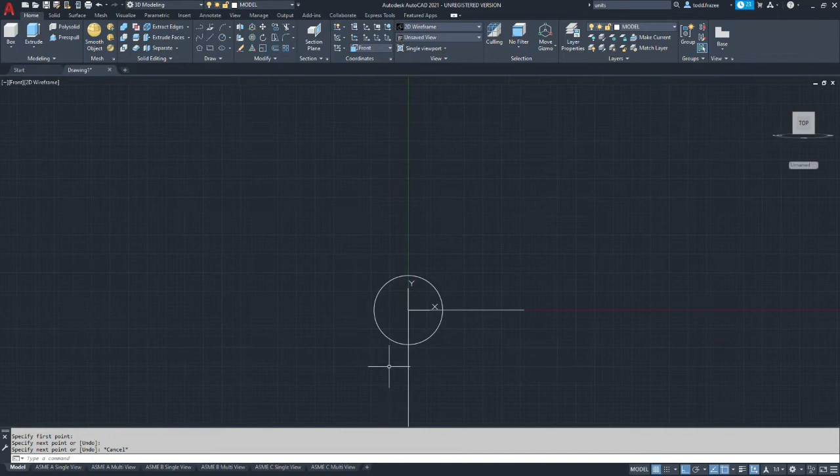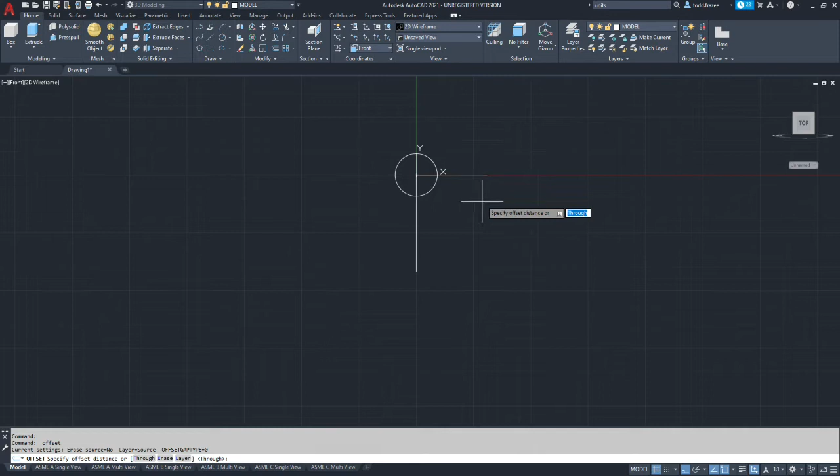Now I'm going to extend. I'm going to extend the two lines I can, and then I'm going to make a kind of bogus line over here just so that I can extend this third line, and that'll allow me to extend the line that's going to make up the width of the base.

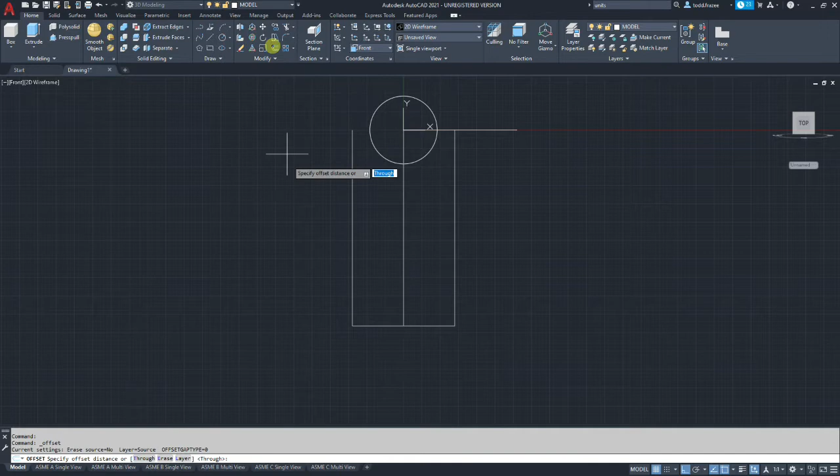Alright, let's switch to trim and trim off those two items, and we'll go ahead and delete the extra line there. So from the base, our base height is 11 millimeters. So we're going to put in 11 millimeters and offset from the bottom for the thickness of our base. Okay, so then we can go ahead and trim off those features.

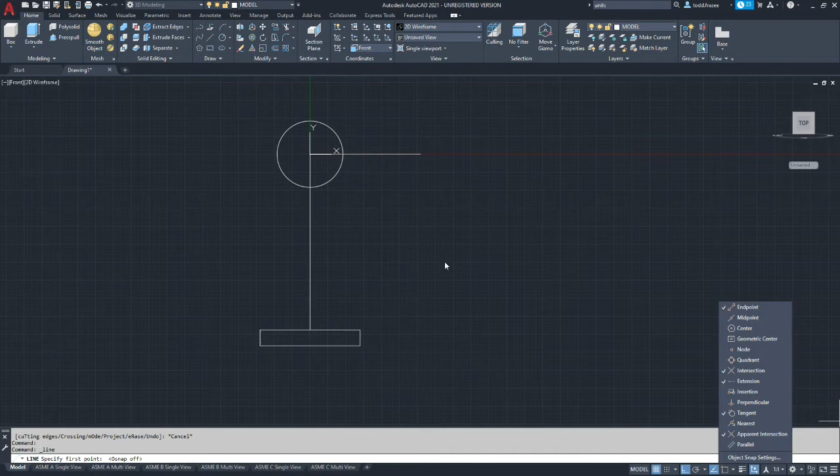Now we want to make our tapered sides for the upper web. And so we're going to use the line command, but we need to change our OSNAP settings. We're going to avoid the center because we want to pick up on a tangent. And you want at least intersection highlighted. I'm also going to deselect midpoint. I don't want to accidentally get the midpoint of something I don't want to use.

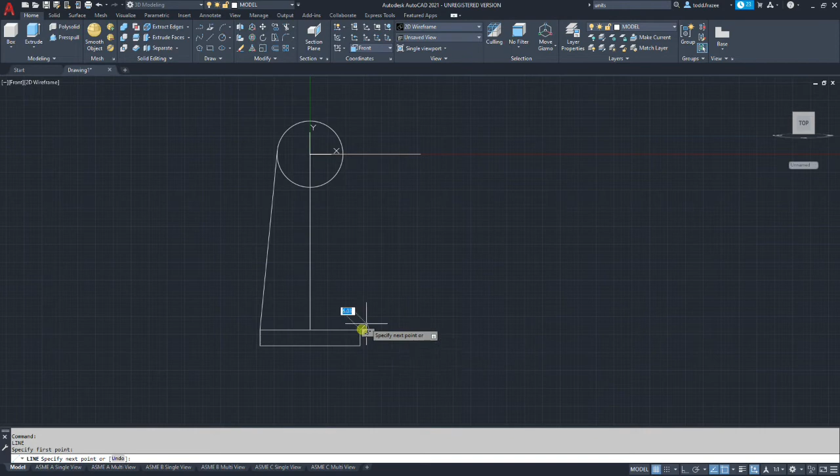And then we'll turn the object snaps on. We're going to go from the corner and turn ortho off and hover again until you see the tangency symbol show up, and then click. I'm going to restart the line command, go from the endpoint, and then hover until you see that tangency point.

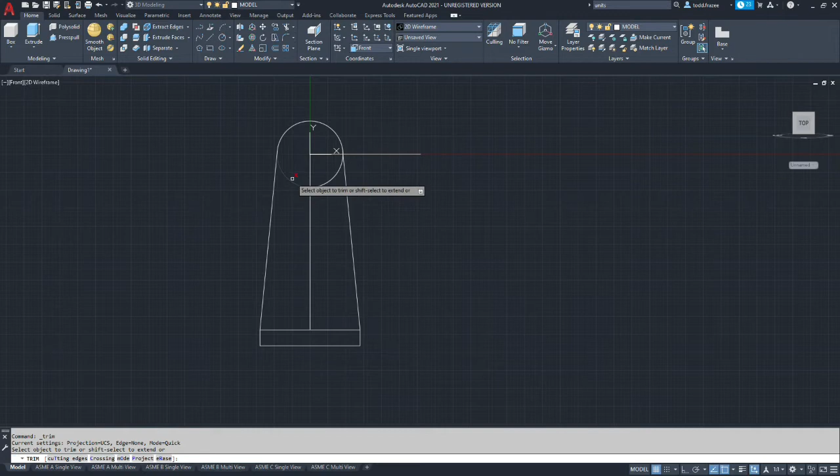Alright, so now we want to trim the base of the circle back. And you want to make sure you zoom in here because there's a little tail of tangency there.

Okay, and we're going to make our regions now. So we're going to draw region and select the 4 lines that make up the first extrusion. Accept those. Now we need to draw another line so we can make a separate region using the second line.

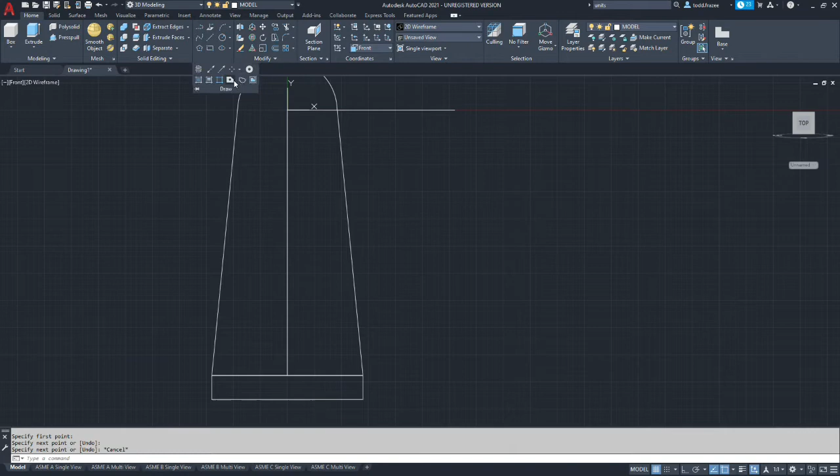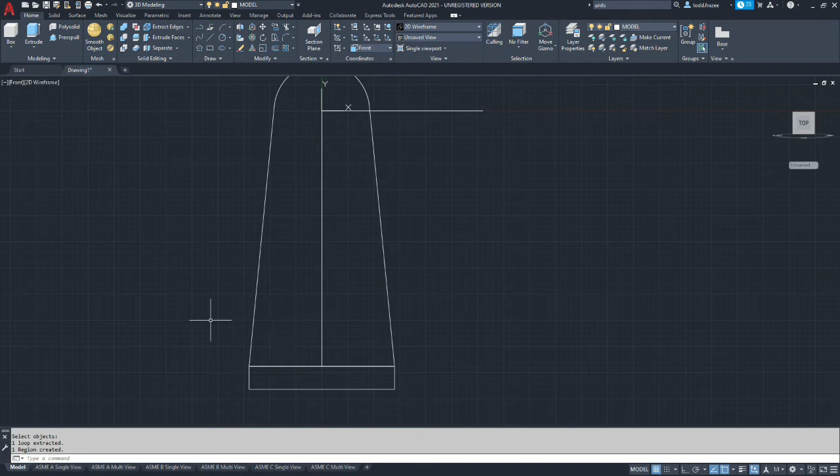We want to select the tapered lines and the arc, so there's our two regions. Because I intend to mirror this, these extrusions are going to be half what they are called on the drawing. Half the distance. Okay, let's start with the first one.

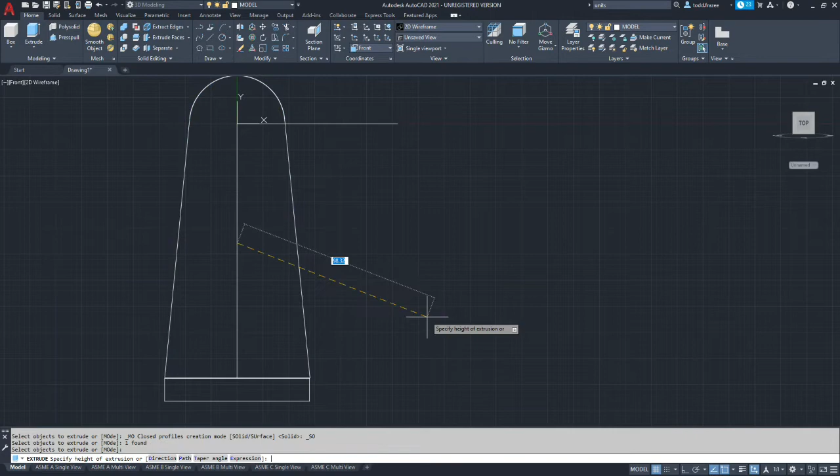We're going to extrude out the larger region, the tapered one, and the overall thickness is 8 millimeters, so we're going to extrude it 4. Remember to go to a 3-dimensional view so you can actually see how much you're doing it. I'll quickly go to shaded mode so you can see we got a 4 millimeter thick plate here.

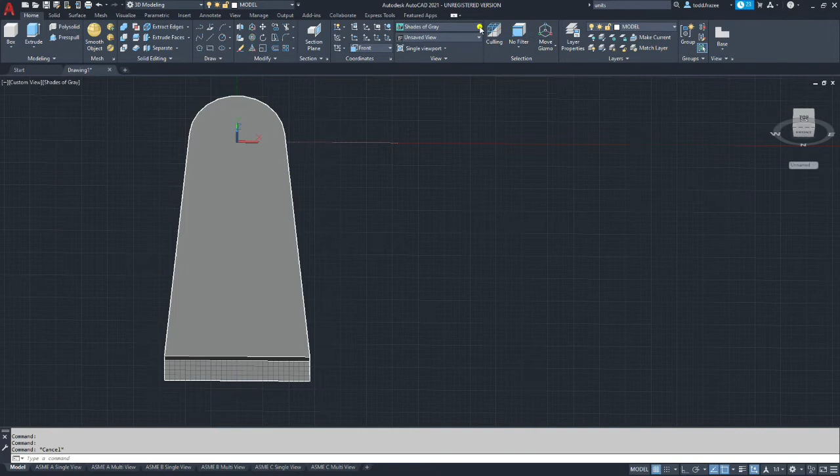Okay, so we're going to go back to wireframe. Then our second extrude is going to be the rectangle. If I can select on it - so we have our rectangle, and the overall width in that direction is 84 millimeters, so we're going to go 42. Alright.

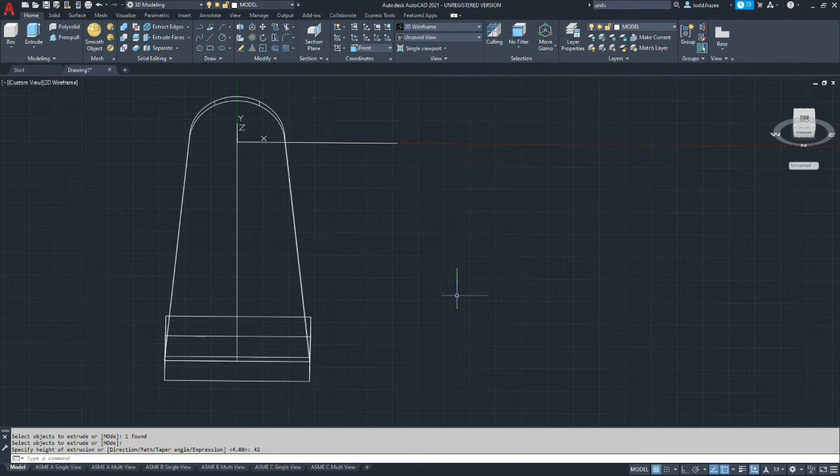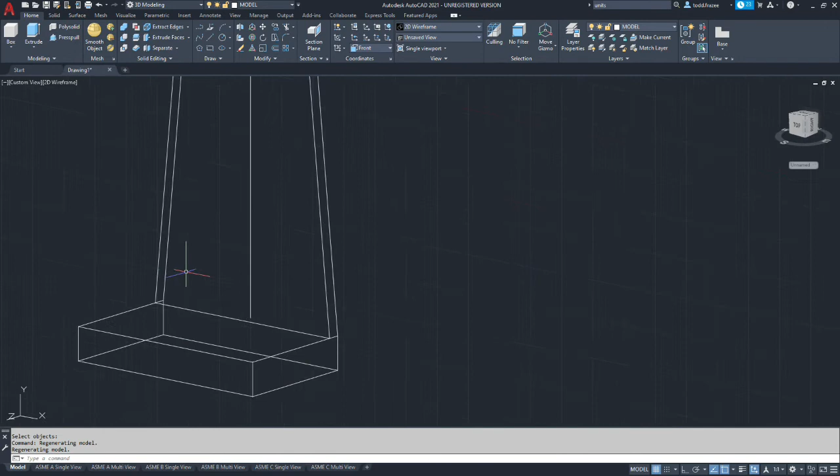So now we have two bodies, and with those bodies we want to join them together. We're going to use the solid union command, and we're going to pick our two bodies and hit enter, which joins them to make them one with each other. Okay, so I haven't saved yet, but make sure you save often.

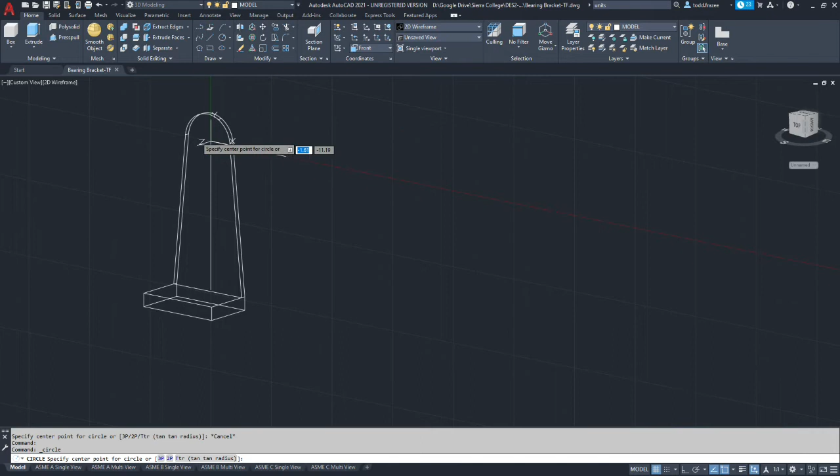Okay, so the next feature we would like to make is we're going to go ahead and make half of the boss that the bore goes through. We're going to go back to object snaps because this time we do want to use center, so we're going to snap to center. We're going to create a circle, and that circle, I want it to be centered. Then we're going to pick the tangency endpoint that'll set the diameter.

I'm going to save, and now we're going to extrude the circle. The height on that, the overall width is 34, but we need to subtract, we need to divide that in half, and we need to subtract 4 from it. So half of that would be 17, and then we'd subtract 4 from it, which gives us 13. So we're going to make our boss 13 millimeters tall.

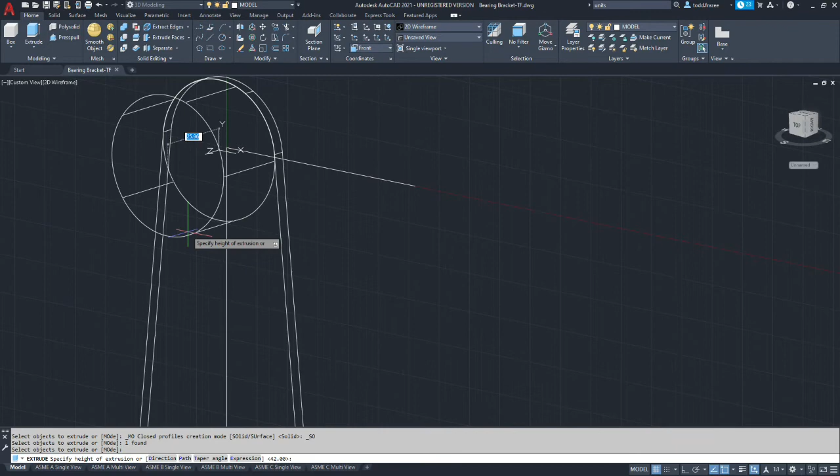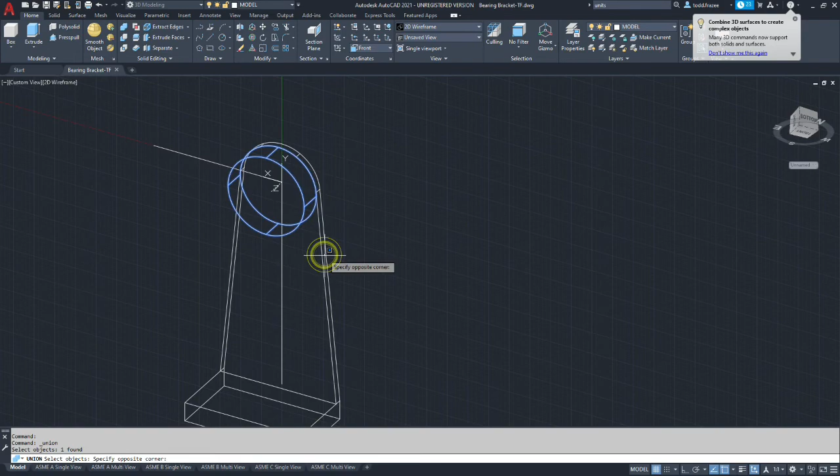Alright, let's go ahead and join those objects. So we're going to join the boss with the rest of the body. Okay, let's take a quick look at this in shaded mode, make sure that we're doing what we think we are. So we have the large boss feature, we have the base plate, and we have this half of the vertical rib.

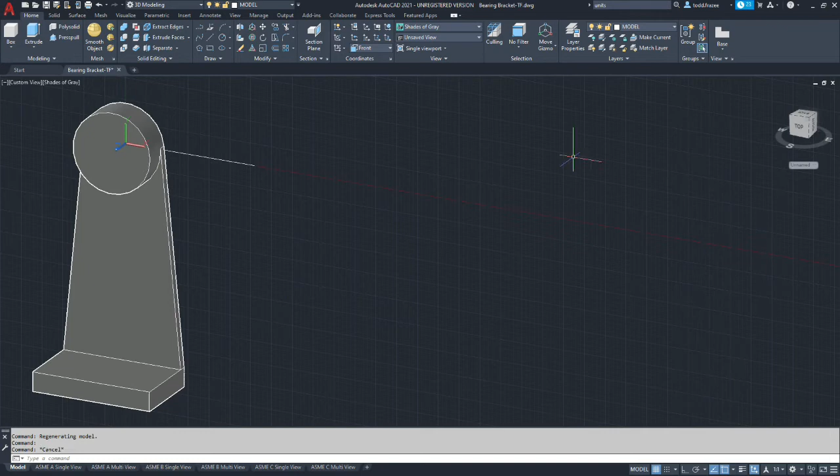Yeah, so we're going to go back to wireframe. Now we're going to develop the geometry for the rib. There are several ways we can make the rib. I'm leaning towards making it the same way you did in the last project, and the reason being is it's intersecting an arced surface. We could extrude it from the side, but then we make a not so clean extrusion that will interfere here.

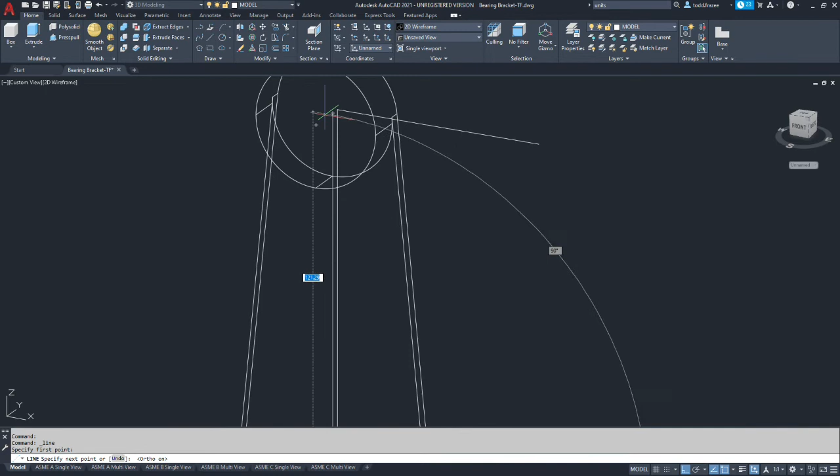So we're going to keep working in the current view, and we're going to start by drawing a line, and we're going to use the midpoint command on the object snap so we can pick up the center of the base, and then we want to go past and go to the center of the arc. Now if we want to be thorough, we really could turn on ortho to make sure that we are all 90 degrees in the same plane. So the line we're working with is the one that's in the plane of the face of the model.

Okay, we will then take and we're going to offset the said line by 8 millimeters per total, so we need to go 4 millimeters per side.

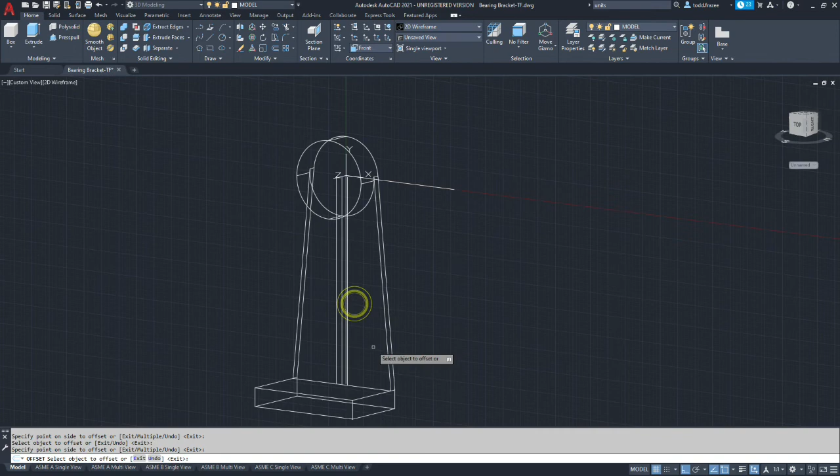Which defines the width of our rib. Okay, so we're going to do a center radius circle.

I'm going to rotate the view so I can see the end of the line. Now, the end of the center line was in the same center as the origin.

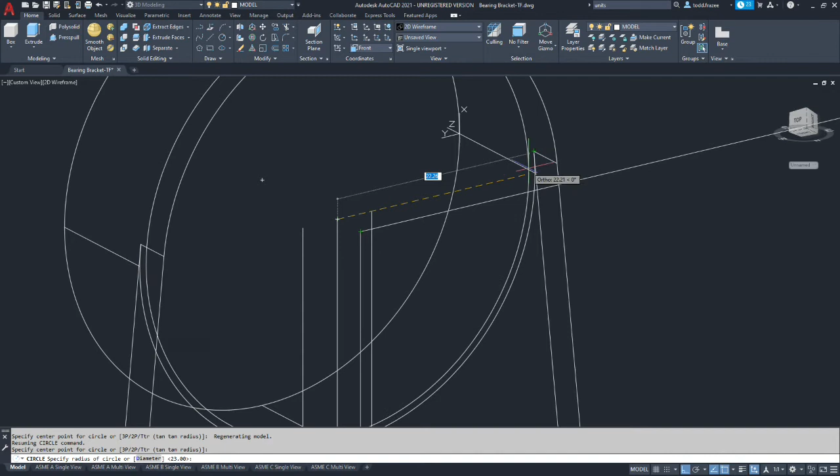I pick a tangency point. And this will allow us to then trim off the line segments we need, and we're actually going to trim off the circle we just created so that we're left with a little arc in the center.

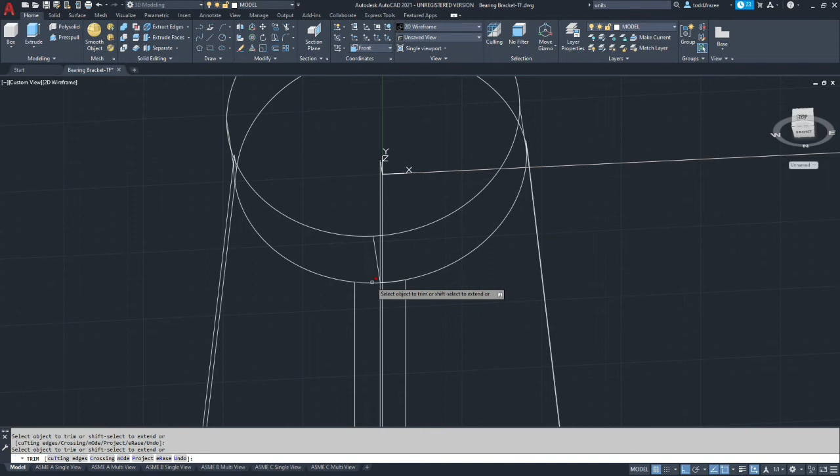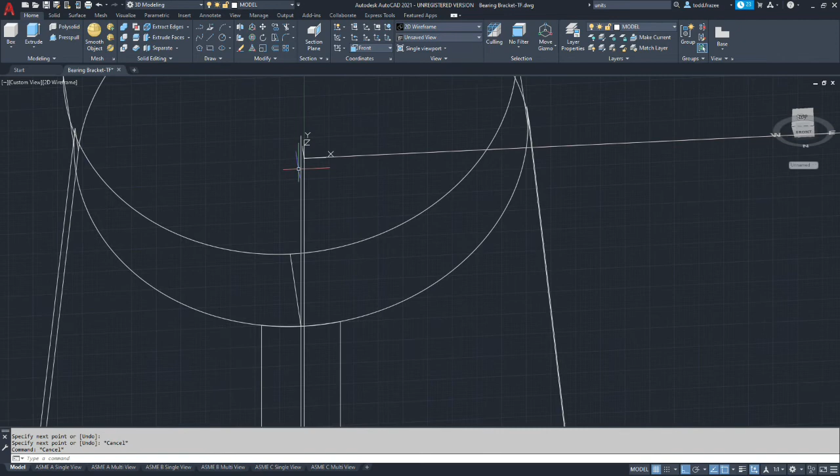And we'll go down and we need to connect the end of our rib. Okay, at this point let's exit out and we can then delete the center line we used for construction initially.

Now what we need to do is we need to create a region out of the line segments and the single arc at the top. And that will allow us to extrude that piece.

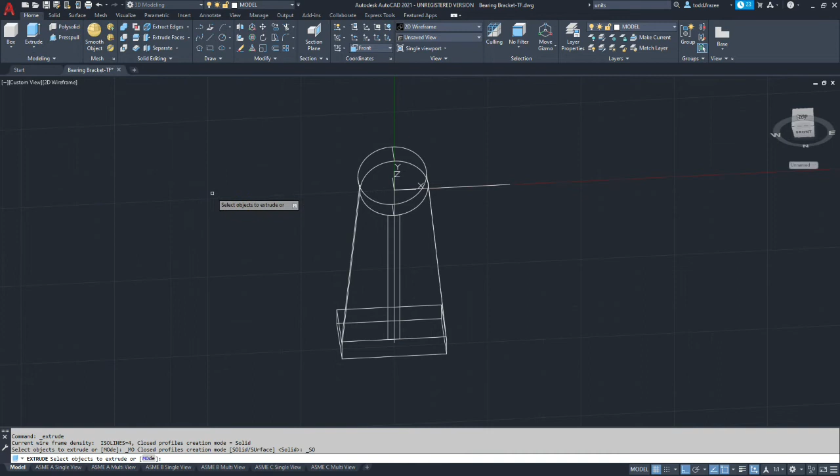And it's going to extrude up 10 millimeters from the face, so it'd be 10 millimeters. Okay, so we have a beginning of a rib there.

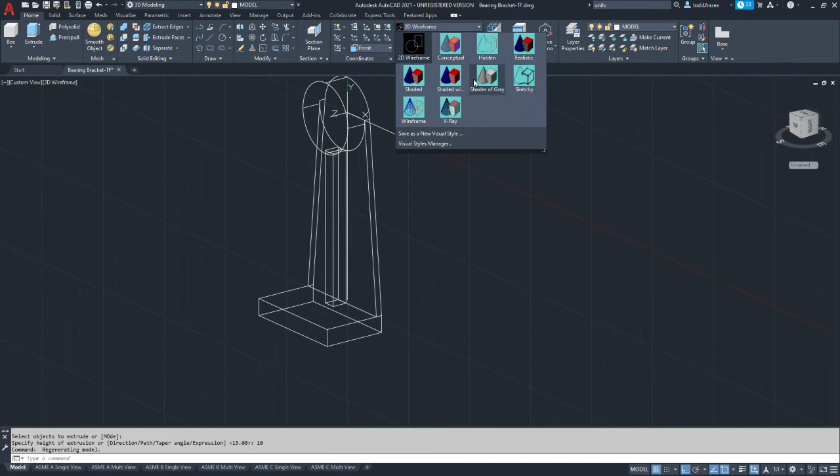Let's look at this in shaded view so you can see what's going on here. So we have our rib. Okay, so we're going to take, and now we're going to make a union between that new rib and the rest of the body, making it one.

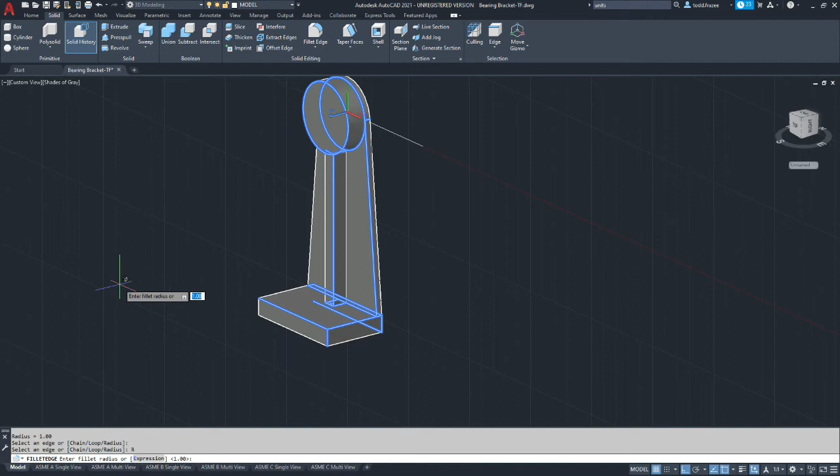Okay, now would be an excellent time to save. Now we have most of the features here we need for mirroring purposes. So we need to add one more boss over here on the left, circular boss.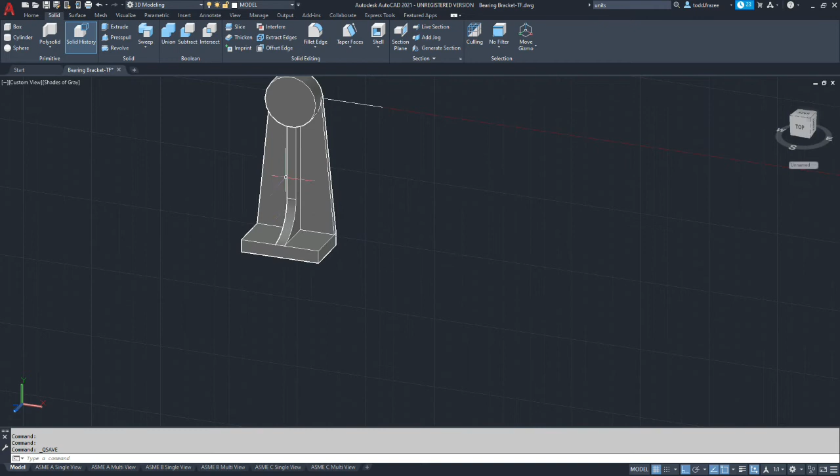And we're going to use our sketch offset lines to locate that. So let's go back to home, and we're going to go back to wireframe mode.

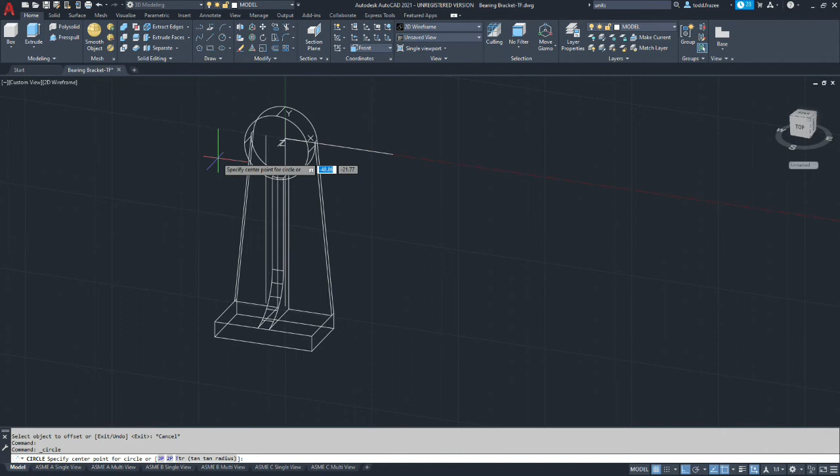The dimensions from center of the part, 14 millimeters, to the left, and then that intersects with an arc. So I'm going to draw actually a circle, but it's a circle that has a radius of 81 millimeters. So at that intersection is where our boss feature is going to go.

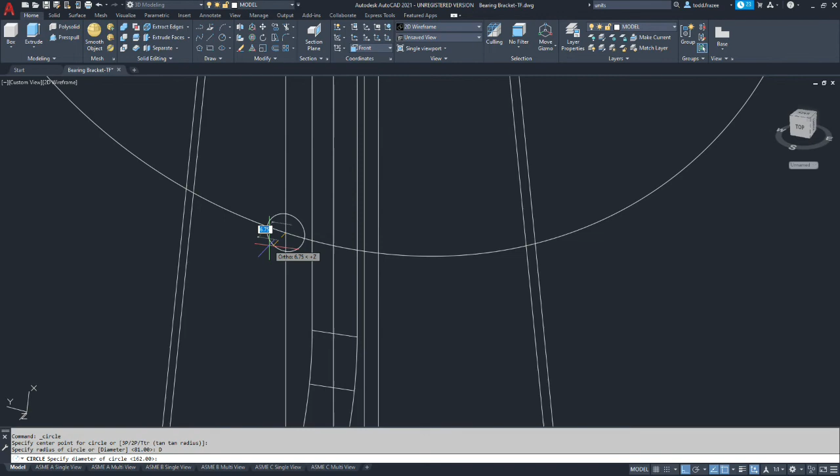So we're going to make a circle, and we want it to pick up the intersection, and we're going to switch the diameters, and it is a 29 diameter boss feature.

Okay, so at this point I'm going to delete our construction lines because they're getting in the way.

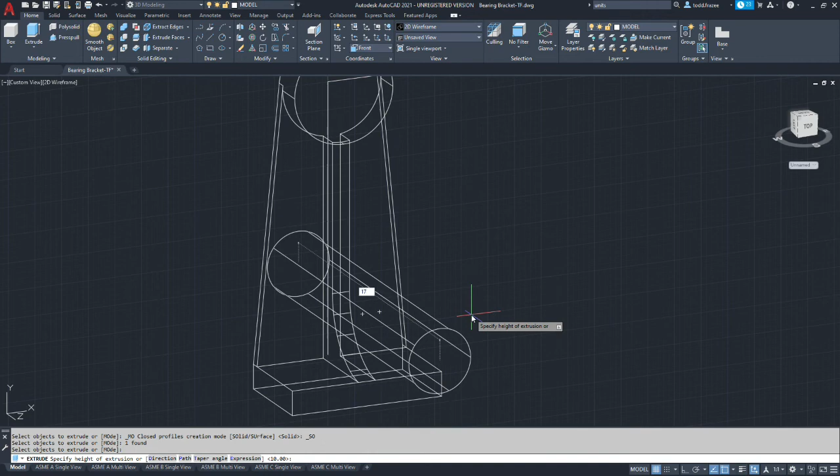And we're going to do an extrude on the said circle, and it is going to extrude the opposite direction. It looks like it's 17 millimeters on the side that we're working on. So we'll need to remember that because the overall dimension is 33. So that boss is not symmetrical like the other portions of the model.

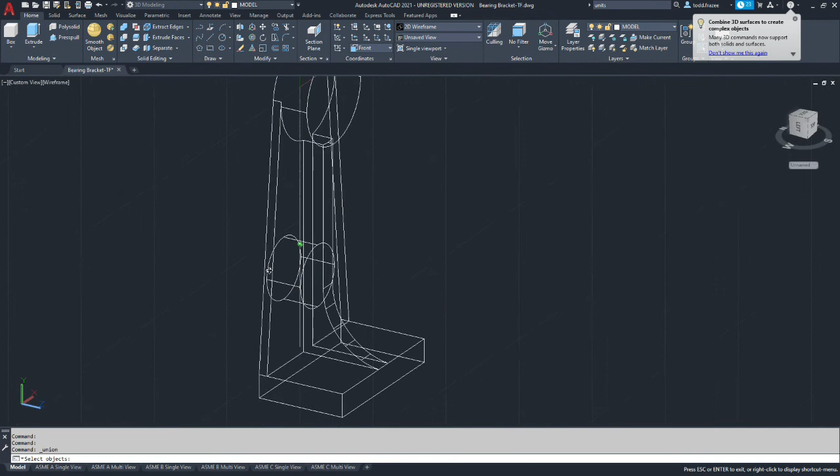Okay, so now let's join our objects. We're going to join this to the main body. Alright.

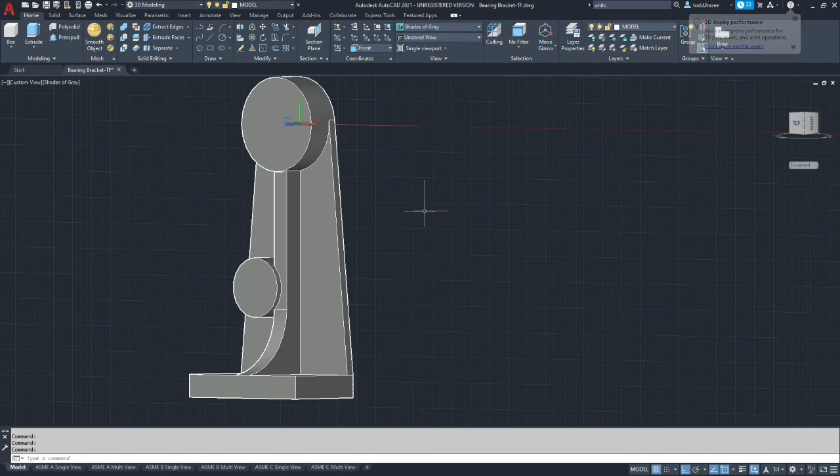And let's shade this so we can see what's going on. Alright, so we've got all our main features, except for holes, and the boss feature that goes on the top, which has to go on last.

So the fillets are going to get tricky. Let's see how we do. We may have to do this more than one time.

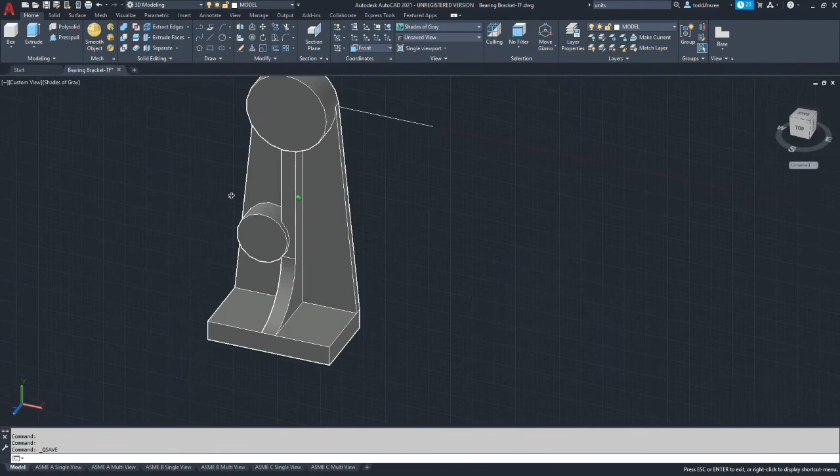But the strategy is going to make the vertical fillets first, what's vertical in this view, as we're looking straight down at it first, and then we'll come back and make the rest of them.

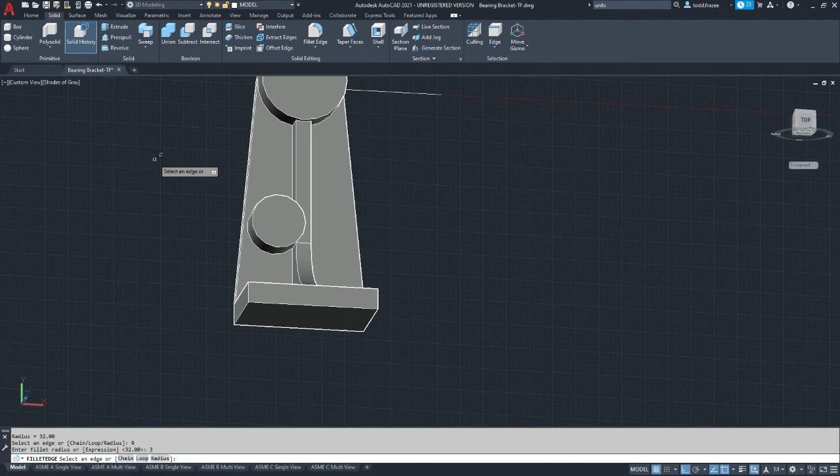So we're going to go to solid, we're going to use the fillet command, we're going to set our fillet radius as 3, and we're going to select edges.

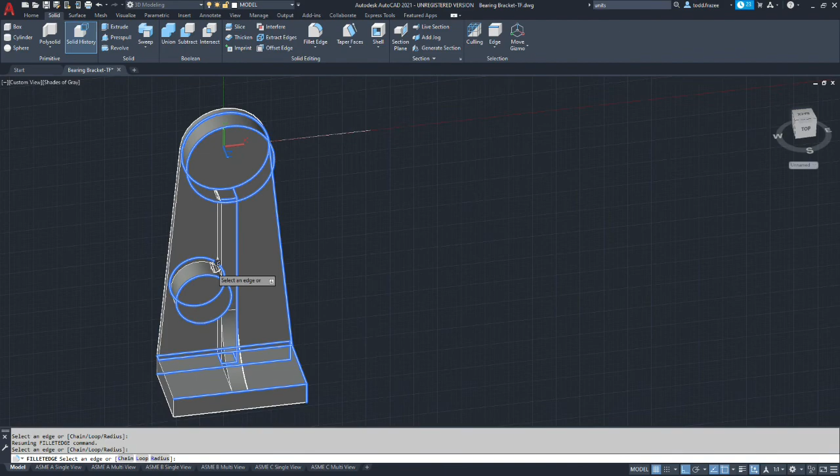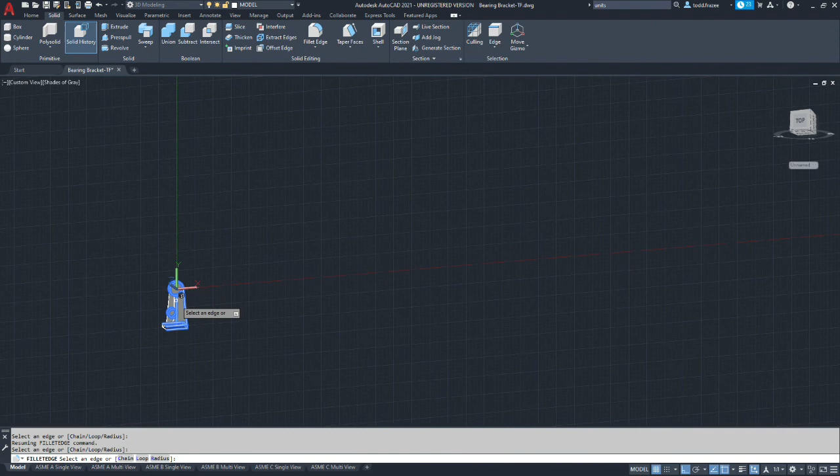So that edge, that edge, edge. That edge. The edge here, and the edge here.

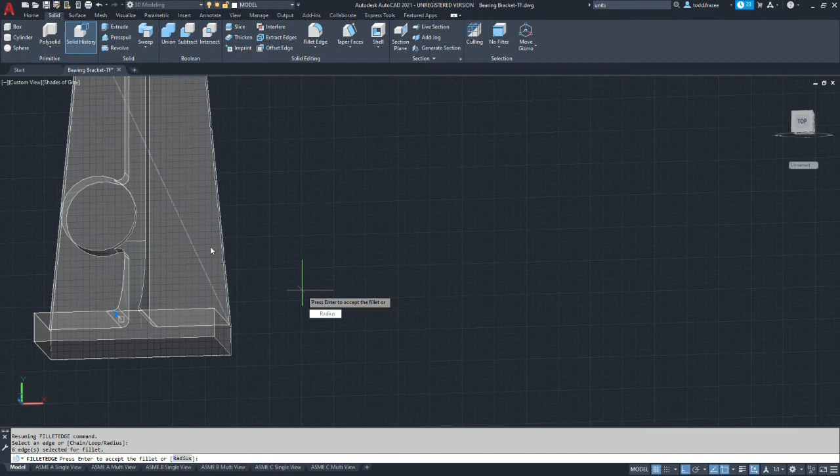I'm going to call that done at first and see what we get. It looks like all of those successfully went in.

So we definitely want to save in case we crash or something like that, or at least we're at this stage.